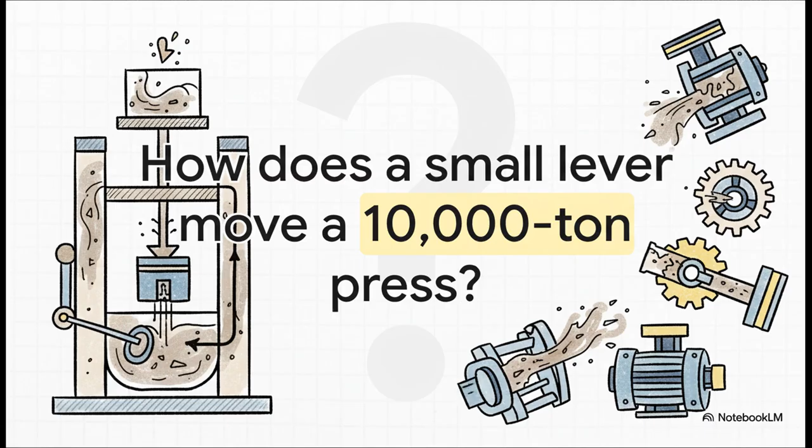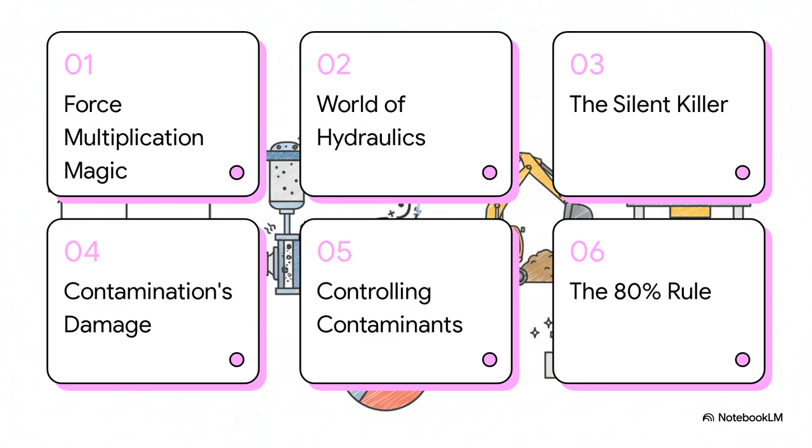So in this explainer, we're going to pull back the curtain on that very magic. We'll look at where all this power gets used, we'll expose its number one enemy, see the kind of damage it can do, and then, and this is the important part, we'll reveal the simple secret to keeping these massive systems running strong. And we're going to wrap up with a single number that will totally change how you look at every big machine you see from now on.

All right, let's start with the secret sauce itself. How is all this insane force generated so easily? Well, it all comes down to one simple, elegant law of physics. It's all thanks to a guy named Pascal. Basically, his law says that if you put pressure on a fluid in a closed container, like hydraulic oil, that pressure is felt equally everywhere at the same time.

And here's the trick. The oil is incompressible. You just can't squeeze it. So if you apply a little bit of force on a small area, you create a ton of pressure. And when that same pressure pushes on a much bigger area on the other side, boom, you get a massive output force. A tiny push in equals a gigantic push out. That's the whole game right there.

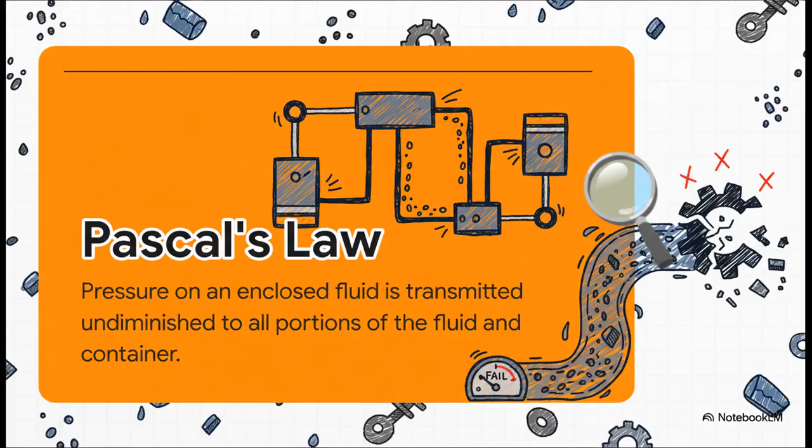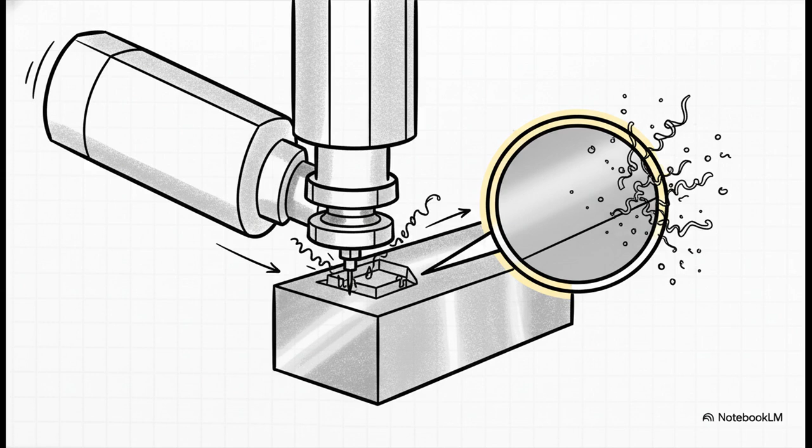So, now that we know the secret, let's see how this brilliant idea literally powers the world all around us. And trust me, you see these systems in action every single day, probably without even noticing. Think about the world of high-tech manufacturing. Precision is everything. Hydraulics give those CNC machines the incredibly strong yet super controllable force they need to cut and shape metal parts with microscopic accuracy.

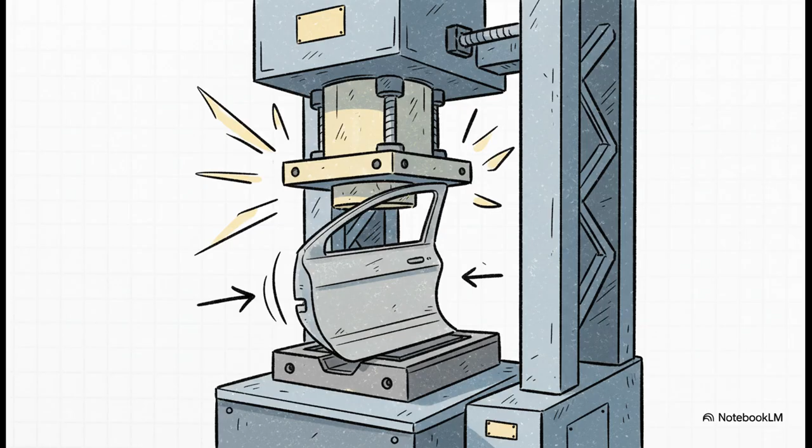Hey, remember that 10,000-ton press we talked about? Well, this is where it lives. In car factories, giant hydraulic presses use that incredible force multiplication to stamp and form car doors and hoods out of flat sheets of steel. It's just amazing.

Okay, this one's easy. The next time you pass a construction site, look for those big, shiny silver pistons on the excavator's arm. That is a hydraulic system, right out in the open. It's what gives that machine both its smooth, fluid motion and the raw muscle to dig through rock.

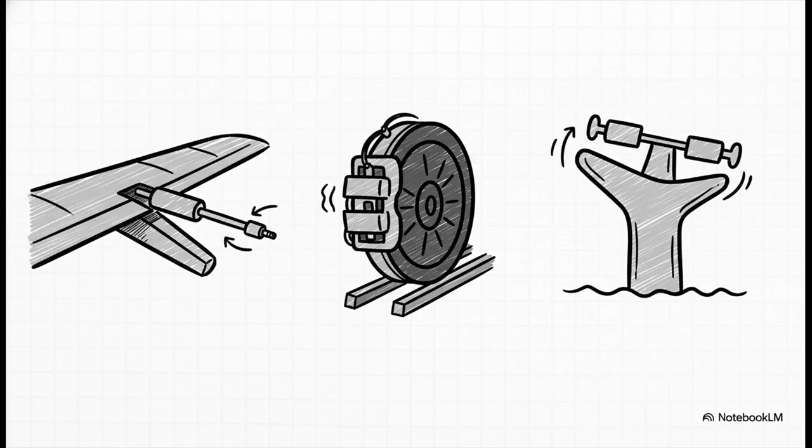And all of this brings up a crucial point. These systems have to be ridiculously reliable. I'm talking about the brakes on a high-speed train, the steering on a giant cargo ship, or, get this, the flight controls on the airplane you're flying in. We are literally trusting our lives to the power and precision of hydraulics every single day.

Okay, so we've established these systems are powerful, they're precise, and they are everywhere. But they have an Achilles heel. A problem that starts so small you can't even see it, but it quietly destroys them from the inside out. So here's the kicker. Even though it's a closed system, it's not perfectly sealed.

As those big pistons move back and forth, the level of oil in the main tank goes up and down. That means the tank has to breathe air in and out. And when it breathes in, it sucks in whatever is floating in the air around it. Dust, dirt, tiny metal particles, you name it.

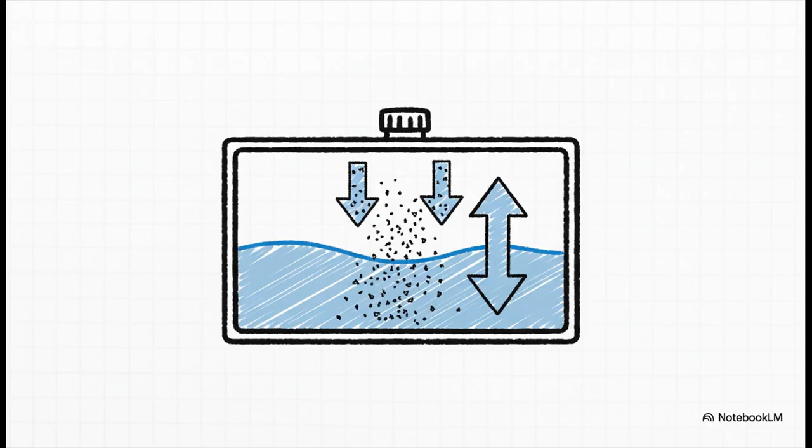And that's when the system's lifeblood gets transformed into its worst enemy. That clean, smooth fluid that's supposed to lubricate parts and transmit power, it turns into a liquid sandpaper. It becomes this gritty, abrasive sludge that just grinds away at the most delicate, most expensive parts of the system.

So let's zoom in a bit, CSI style, and see exactly what happens when this abrasive sludge starts pumping through the veins of the machine. The damage it leaves behind is, well, it's systematic and it's catastrophic. So someone actually went and asked maintenance pros, hey, where does it hurt the most? And the results are so telling.

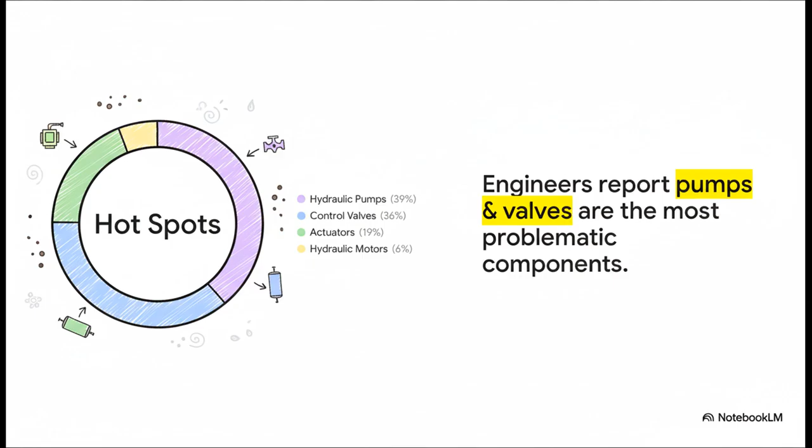So first, it gets breathed into the tank. Then it's sucked into the pump where it scratches and gouges the finely machined surfaces. From there, it gets blasted at near supersonic speed through a relief valve, basically sandblasting the delicate parts and causing pressure to leak. Then it might get jammed in a control valve, causing the machine to stick.

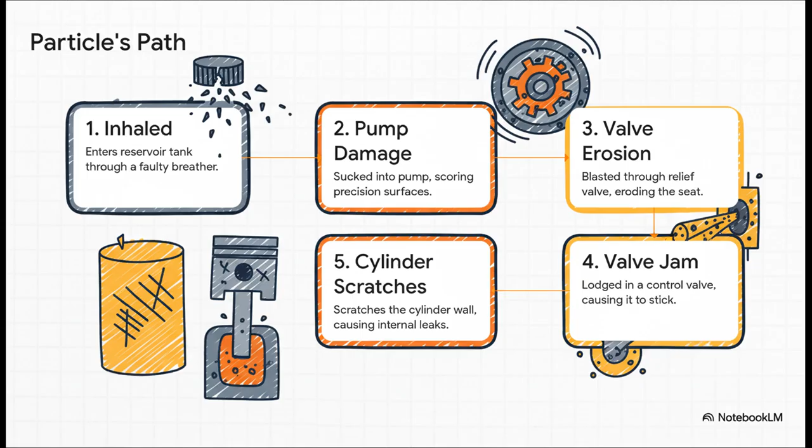Finally, it scrapes along the main cylinder wall, creating a tiny leak that slowly bleeds away the machine's power. One invisible particle leaves a massive trail of destruction. And all that internal chaos, it starts showing up on the outside as real-world problems. The machine gets sluggish, or maybe its movements become jerky and erratic. It starts running super hot.

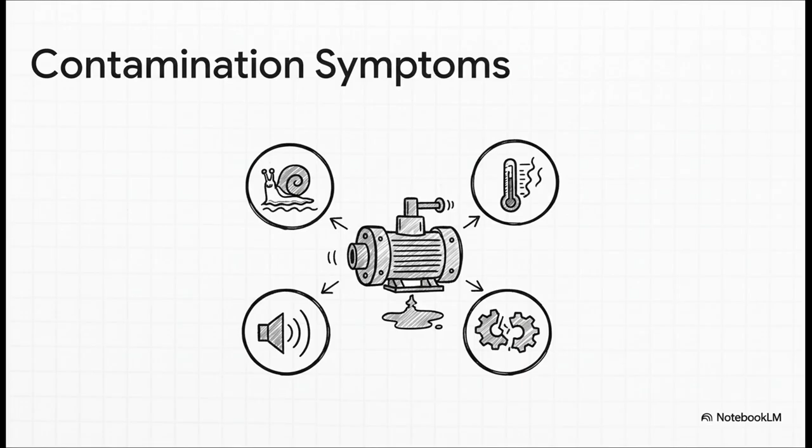Key parts like pumps and valves start failing over and over again. You'll hear weird noises and see leaks popping up as the seals get chewed up. These aren't just random, unlucky breakdowns. They are all symptoms of one single root cause. Now, I know this all sounds pretty bleak, right? But here's the really good news. This is an almost completely preventable problem.

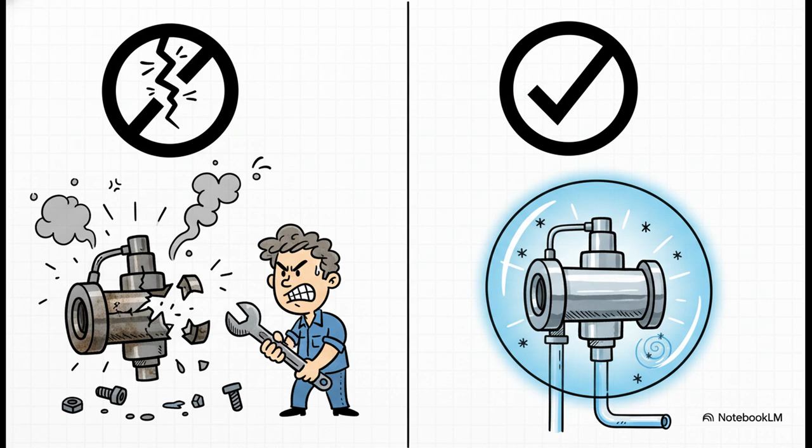The solution isn't some crazy complex technology. It's just about a shift in mindset. It really boils down to this. You have to stop thinking about fixing things when they break and start focusing on stopping them from ever breaking in the first place. That's what we call contamination control. Because when you protect the fluid, you're protecting the entire multi-million-dollar machine that it runs.

And the practical steps are actually pretty straightforward. Use good, high-quality breathers on the tank. They're like N95 masks for your machine. Don't ignore them. When you check the oil, take a sample from the fluid that's actually circulating, not from the sludge at the bottom of the tank. And hey, when a filter gets clogged, that's a good thing. It means it did its job. Change it. Don't just let the dirty oil find a way around it.

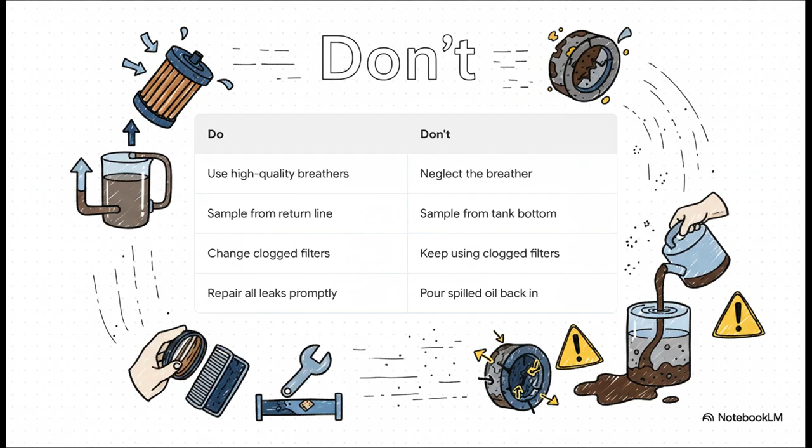And that brings us to the single most important point of this entire explainer. If you remember just one thing from our time here, please make it this number. 70 to 80%. Just let that sink in for a moment. What in the world could that possibly represent in the world of hydraulics?

That's right. The overwhelming majority of all hydraulic system failures, all the expensive downtime, the crazy repair bills, the lost production, it's not because of bad luck or random mechanical problems. It is directly caused by dirty oil. And that means most failures are not just predictable, they are, in fact, preventable.

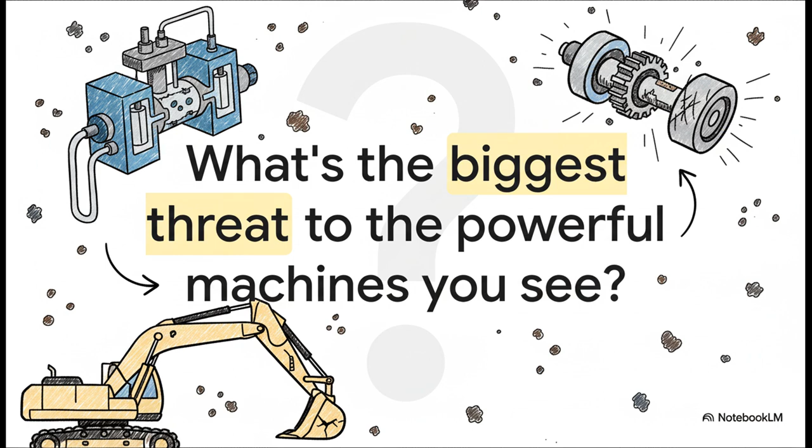So, the next time you see a massive crane effortlessly lifting a steel beam, or you watch an excavator digging with incredible force, you'll know the secret. The biggest threat to that powerful, expensive machine isn't some massive overload or simple wear and tear. It's the thing you can't even see, the unseen enemy, a single, tiny particle of dust.